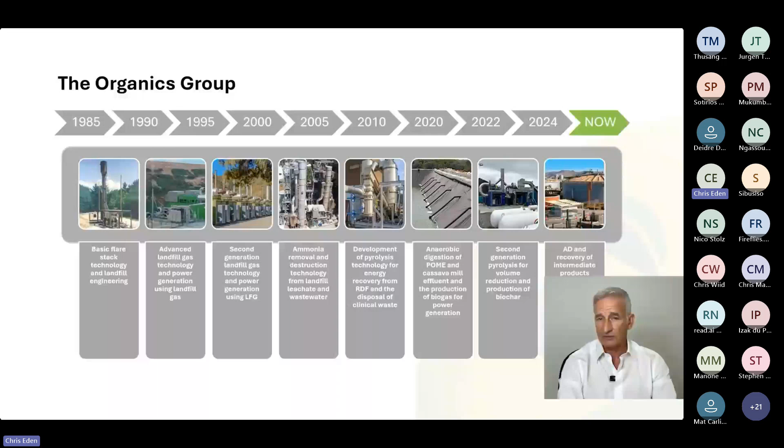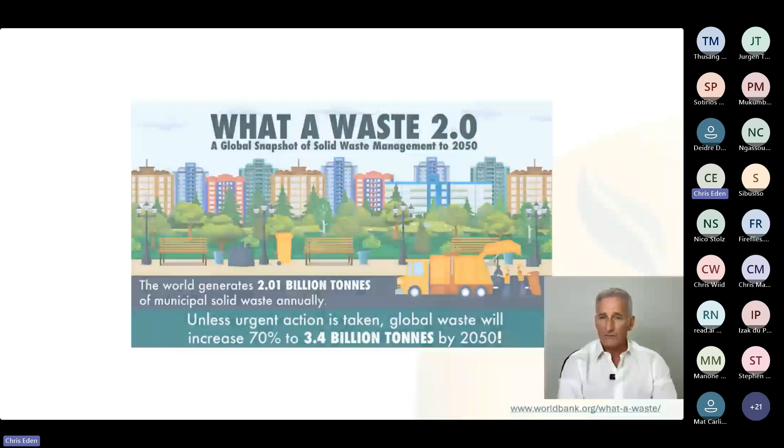The world is facing a growing waste management crisis that affects every country and everybody. The situation is well presented in this brochure prepared by the World Bank. As urbanization, economic development, and population growth continue, the World Bank projects a staggering 70% increase in global waste generation, from 2.01 billion tons in 2016 to 3.4 billion tons by 2050. Food and green waste make up a significant proportion of the total waste generated globally, accounting for up to 44%. While Africa currently generates the least amount of waste compared to other regions, it still faces unique challenges in terms of modernizing and improving its waste management practices.

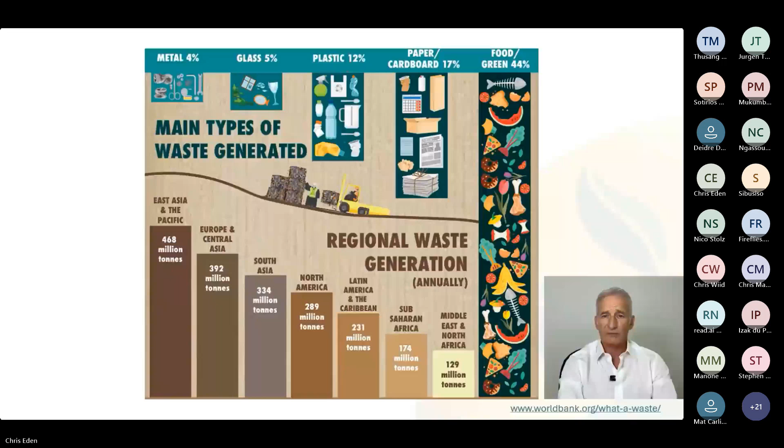Shockingly, at least a third of this waste is currently mismanaged through unsustainable practices like open dumping or burning, leading to environmental, health, and economic consequences. This alarming situation underscores the urgent need for effective and sustainable waste management solutions to protect our planet and its inhabitants for generations to come. Moreover, the inefficient use of resources and the failure to recover valuable materials from waste streams leads to significant economic loss, not to mention the missed opportunities for job creation. So something needs to be done.

The feedstocks for AD can come from a variety of sources, including manure from livestock, wastewater with biosolids from municipal sewage sludge, as well as other organic waste such as fats, oils, grease, and crop residues. These feedstocks can be digested in isolation or co-digested to optimize the AD process. During the process, the feedstocks are broken down by the microorganisms in an anaerobic environment, typically within a sealed reactor or digester, and the end products of this process are biogas and digestate.

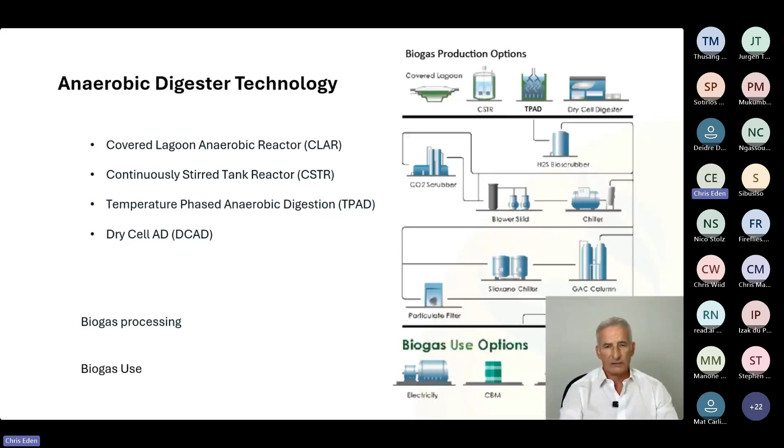Once it's been cleaned and prepared, biogas can be used to generate electricity or heat, and used as a vehicle fuel in the form of compressed biomethane. So the first technique we're going to be looking at is the covered lagoon anaerobic reactor.

It's a process that treats liquid waste with low solid content in large, shallow earthen basins covered with a gas-tight membrane. The anaerobic microorganisms break down the organic matter, producing biogas and treated effluent. The process is suitable for waste such as animal manure, industrial wastewater, and diluted food processing waste with a solid content of less than 3%.

Lagoons are designed to have a depth of between 4 to 6 meters and a large surface area with a retention time of around 30 to 60 days. Biogas yield depends on the feedstock type, the organic loading rate, and the operating conditions, while the treated effluent can be used as a fertilizer.

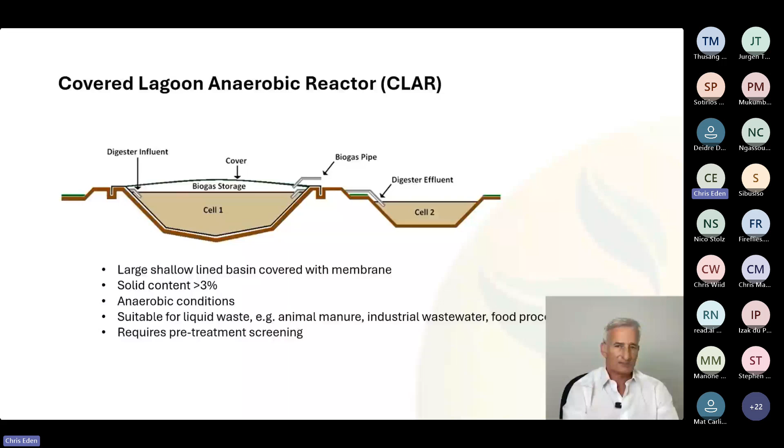This photograph shows a covered lagoon installed on a palm oil wastewater treatment plant in Indonesia. The lagoon is purpose-built with a series of internal injectors that encourage methane production. The biogas generated must be cleaned of impurities before it can be used.

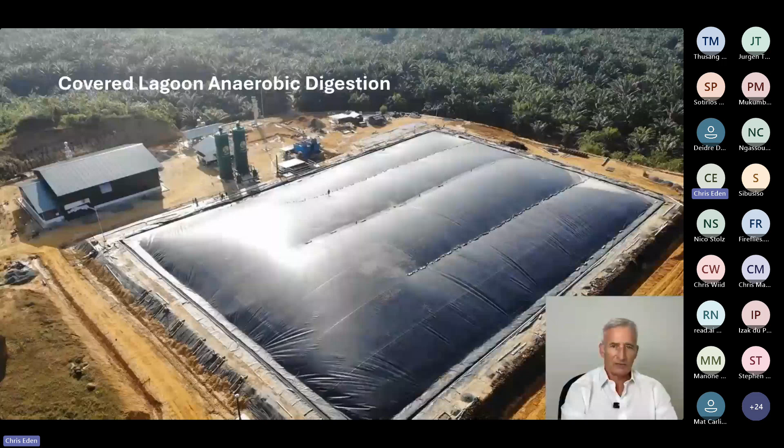Operating parameters include that it can operate between 10 to 40 degrees centigrade, depending on the climate and the availability of heat. But of course, this has a direct effect on the retention time, which can be between 30 and 60 days, depending on the feedstock and the temperature. The pH is maintained between 6.5 and 7.5 for optimal microbial activity.

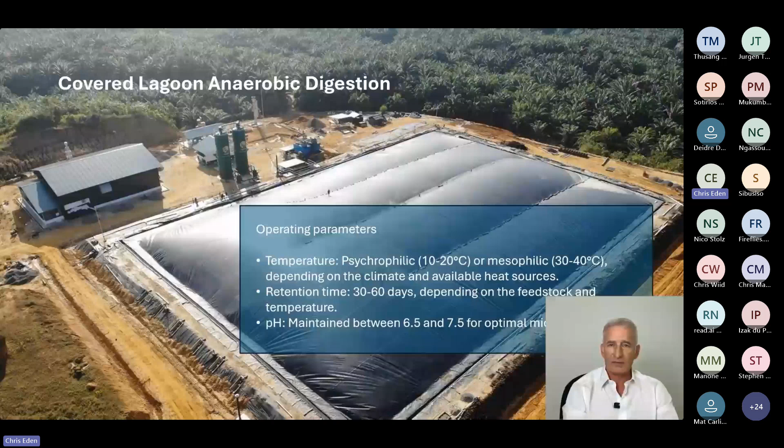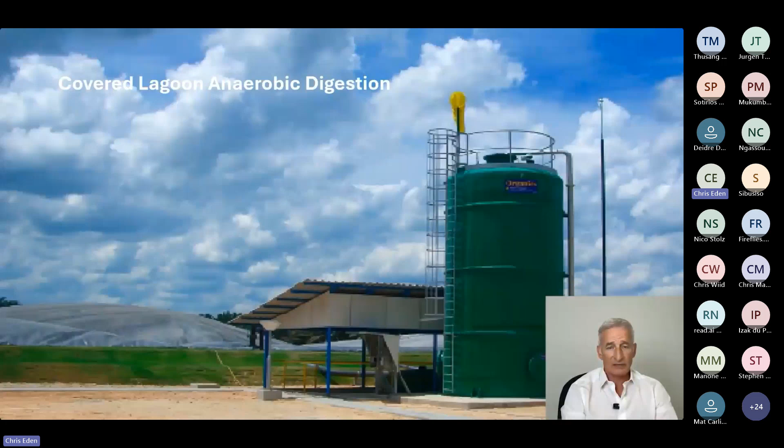In the next photo, this illustrates the use of biogas from the digestion of palm oil mill effluent. In this case, the methane is being used for the generation of power to provide electricity to the palm oil mill itself.

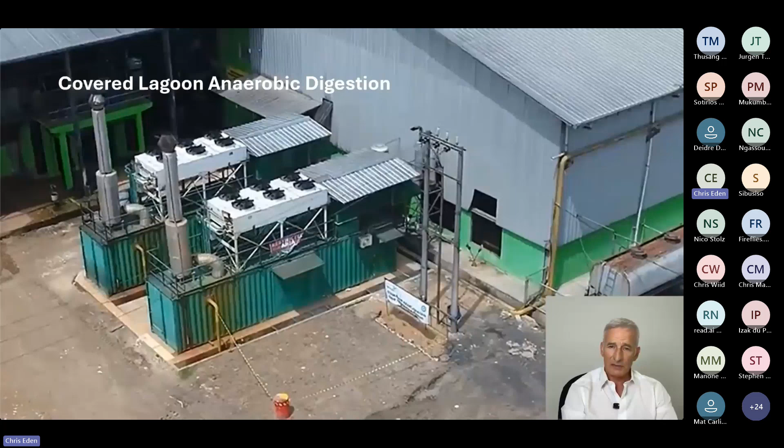CSTR is a type of anaerobic digestion where the feedstock is continuously mixed in a cylindrical egg-shaped reactor tank. Bacteria break down organic matter in the absence of oxygen, suitable for liquid feedstock with a solid content of up to 12%. For example, wastewater treatment plant biosolids or industrial wastewater.

As minimum solids content, we recommend 0.2 to 0.5% solids content and a minimum COD of about 3,000 milligrams per liter. Feedstock should be free of large particles and grit to prevent sedimentation.

Myself, as an anaerobic digestion advisor for over 40 years, I have extensive experience with many different designs of CSTR digesters, many different mixing systems, and we will discuss some of that here in this presentation.

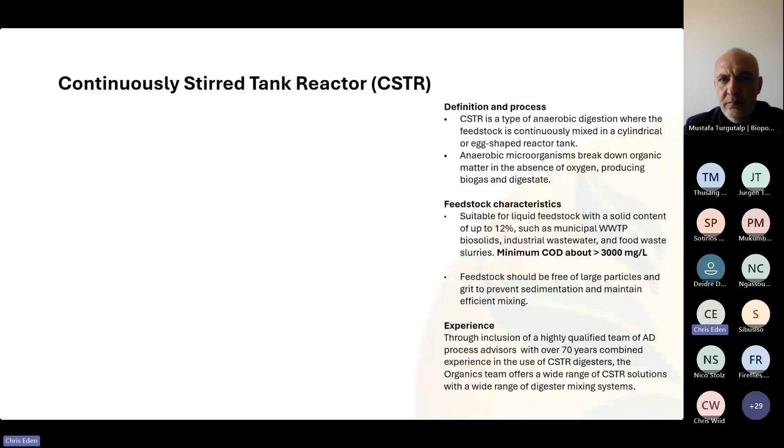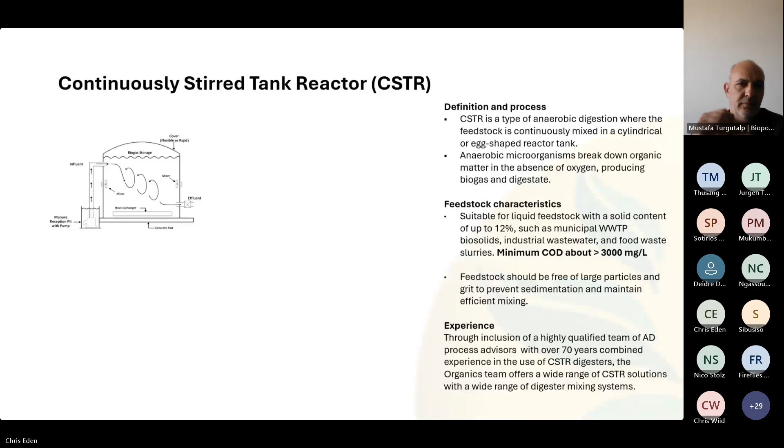Here is a schematic showing that for a manure application, the feedstock will be pumped into the digester either at the bottom or the top, as shown here, and the mixing system can be mechanical or hydraulic with jet mixing, or biogas recirculation through the tank with the aid of eductor tubes brings the feedstock in contact with the resident sludge of the anaerobic bacteria. Feedstock should be free of large particles.

This is a design from 1990, one of the first agricultural digesters in New Zealand, working on the sheepyard droppings as well as high-fat waste from the rendering operation at a large slaughter facility.

In the old days, the biogas was stored in an external pillow tank. Normally, these days, we have it all under the roof in the double membrane roof.

Here, a more modern application with a fixed roof CSTR digester from the largest food waste digester in the Southern Hemisphere that was designed and constructed in 2000 in Sydney. The biogas was basically used as it was generated for power production and for drying the digested residue.

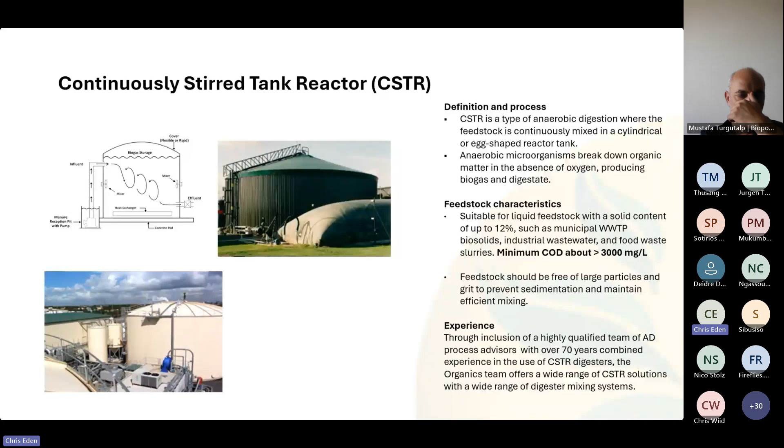At Organics, we offer, in addition to traditional CSTR design, CSTR Plus, where we add features to increase the digestion efficiency and the organic loading rate.

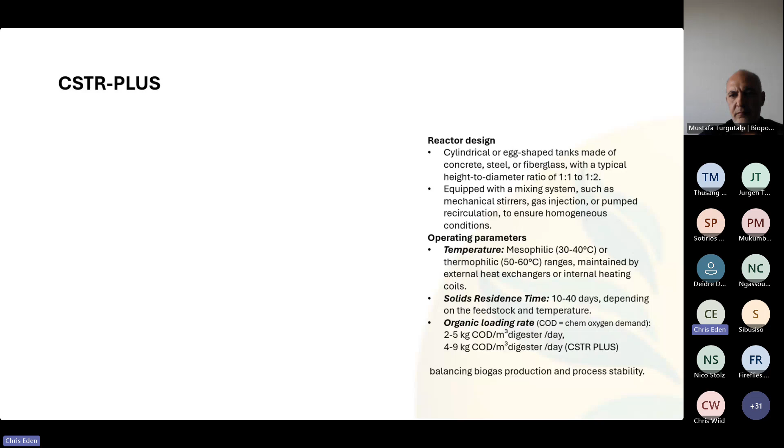Mixing systems like mechanical, gas injection, or pump recirculation are available for all those applications. Temperatures could be mesophilic or thermophilic, maintained by external heat exchangers or internal heating coils. Solids residence times, depending on the concentration of the feedstock, between 10 to 40 days. And of course, temperature plays an important role.

A standard CSTR without the plus feature may be 2 to 5 kilograms COD per cubic meter digester per day, a suitable organic loading rate. With the plus feature implemented, it is typically double that amount. It could be triple depending on the nature of the waste.

Critical is, as always, balancing the biogas production and process stability.

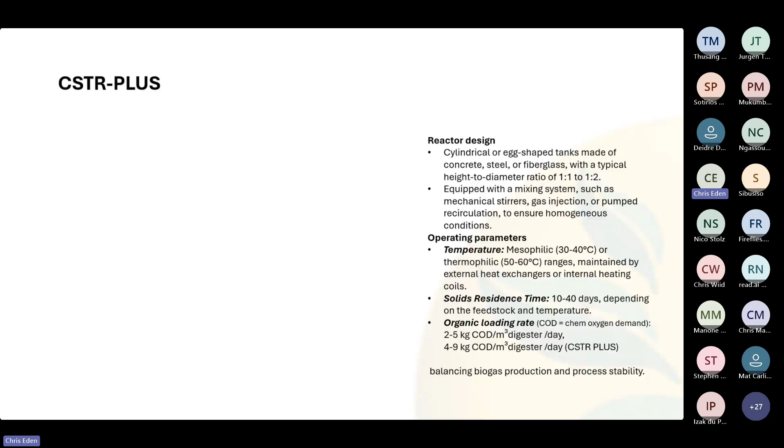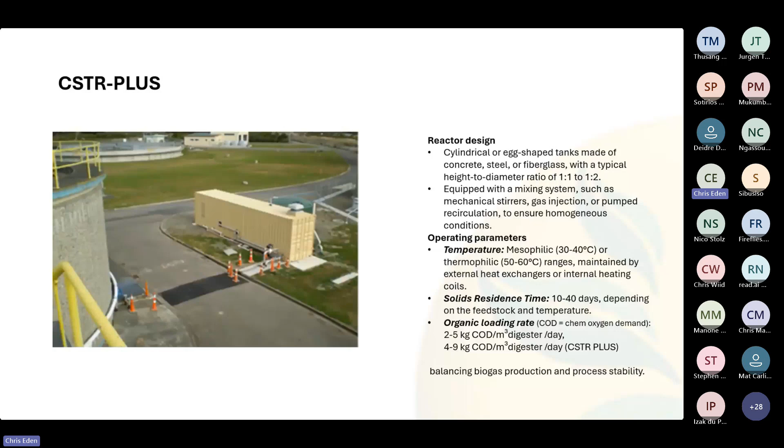Here's an example from New Zealand where the plus feature, a recuperative thickener, is housed in a container connected to an existing 50-year-old digester tank, which allowed doubling of the throughput and the permissible COD loading rate to this existing digester tank. So it can be retrofitted.

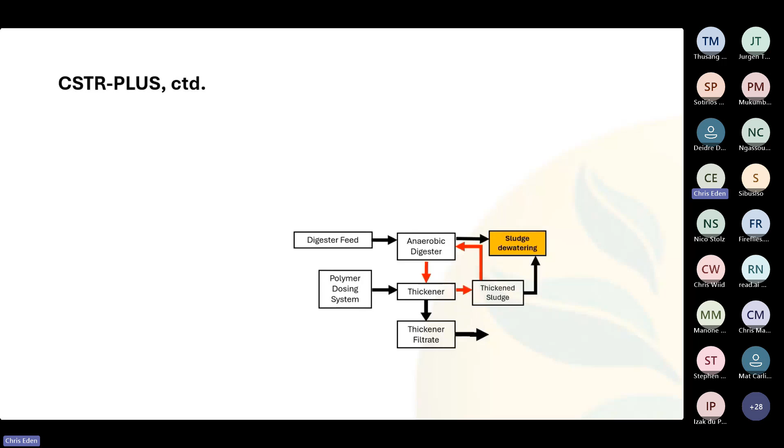The feature is shown with this process flow scheme in the red arrows: digester contents are continuously pumped through the thickener. The thickened sludge is returned into the digester, and the excess filtrate removed can be disposed to further treatment or other applications. Part of the thickened sludge can also be forwarded to sludge dewatering to make sludge cake for export from the plant.

Typical thickeners can be drum thickeners, but there are many other options to choose from. All have in common low power consumption, full automation, and low maintenance. A weekly clean is normally sufficient, and low polymer consumption, 4 to 5 kg polymer per ton dry solids. For example, in dewatering, the polymer dose will be 2 to 3 times that amount.

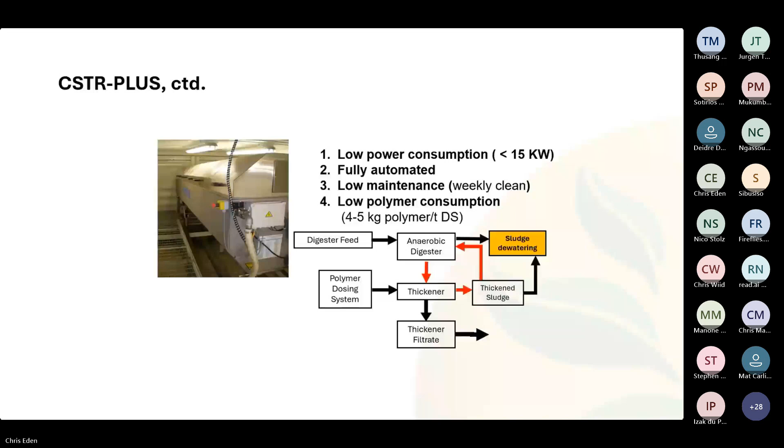Here's an example of the filtrate removed from a municipal wastewater treatment digester. In this application, the recuperative thickener was in a separate building, allowing the whole sludge load to run in a single tank, permitting clean out, rebuilding, and optimization of digestion in the other tank. One could then swap the thickener over to the reconfigured tank and upgrade the tank that was previously running at double the load due to the recuperative thickening or plus configuration.

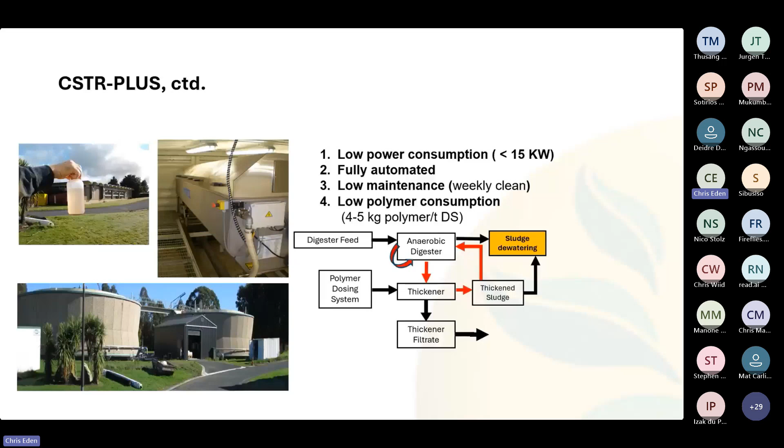In high fat content waste applications, the plus feature is possible, but typically would not be as advantageous as in standard CSTR applications. Continuous mixing prevents formation of dead zones.

The biogas yield depends on feedstock type, organic loading rate, and operating conditions. Typical biogas composition could be 55 to 75% methane. High fat content gives high methane content in the biogas, and we use a bioengineering approach to optimize the digester bacteria culture for fat digestion.

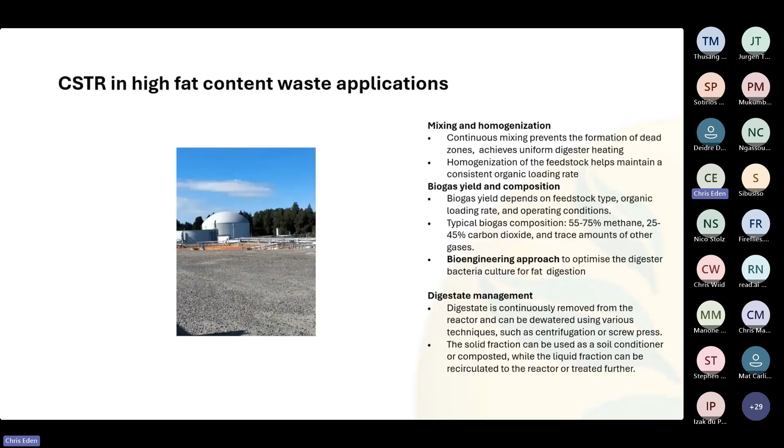This is an application of a CSTR plus feature in a recent dairy factory commissioned by us five years ago for the removal of DAF sludge and other high fat wastes from the dairy factory.

Now, the big picture this is based on is the standard known flow diagram of carbon and electrons in anaerobic digestion. Complex organic polymers are converted to volatile fatty acids and long-chain fatty acids, which are broken down by symbiotic bacteria into acetic acid, hydrogen, and formic acid.

Then hydrogen, formic acid, and acetic acid are removed from the digestion broth by methane bacteria to produce CH4 and CO2. So methane bacteria remove acid in essence and produce gas, leading to acid removal and neutralization of the pH in the digester.

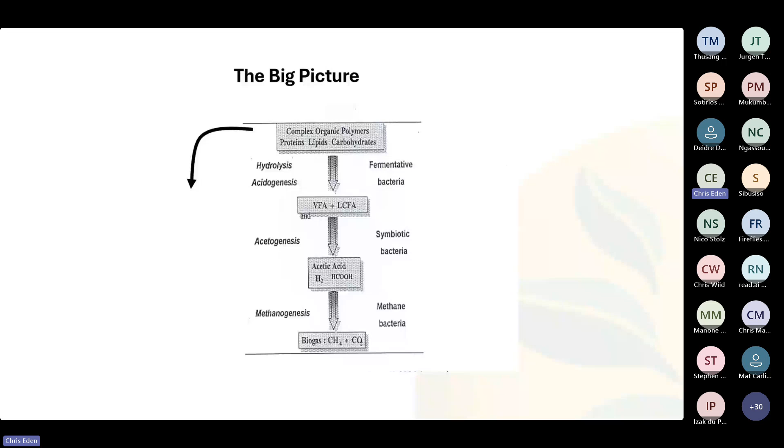If the flow from the top into the digester is higher than the removal activity the methane bacteria can catalyze, the digestion process is likely to acidify and become self-inhibited. Other inhibitions are ammonia, produced from protein degradation, which gradually inhibits methanogenesis. Long-chain fatty acids from fat degradation are very potent inhibitors of methane bacteria. So the system has to be well balanced to have a stable COD flow from the top to methane and CO2.

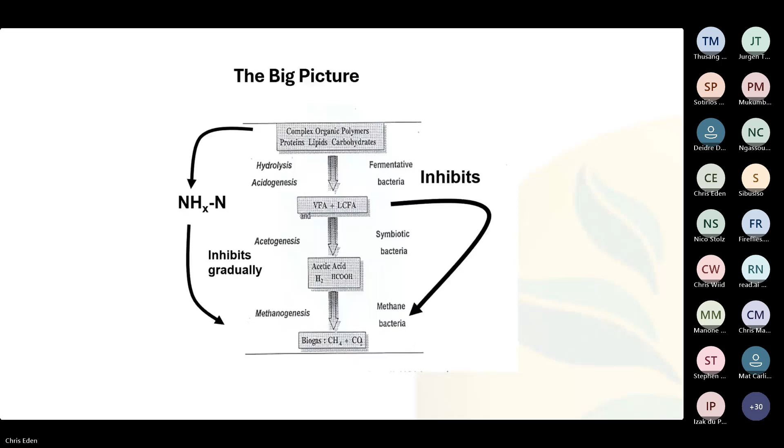Looking at the big picture, mesophilic ranges typically have half the capacity for COD loading at the top, at the complex hydrolyzing bacteria level, and also half the capacity of thermophilic bacteria for methane production and COD removal.

In order to adjust a digestion process, one can couple two CSTRs in series to achieve digestion stage separation, and we'll show an example later in this presentation. This digestion stage separation adds robustness and resilience to the digestion process. The initial hydrolysis stage produces acids, and the final methanogenic stage removes the acids in a separate tank.

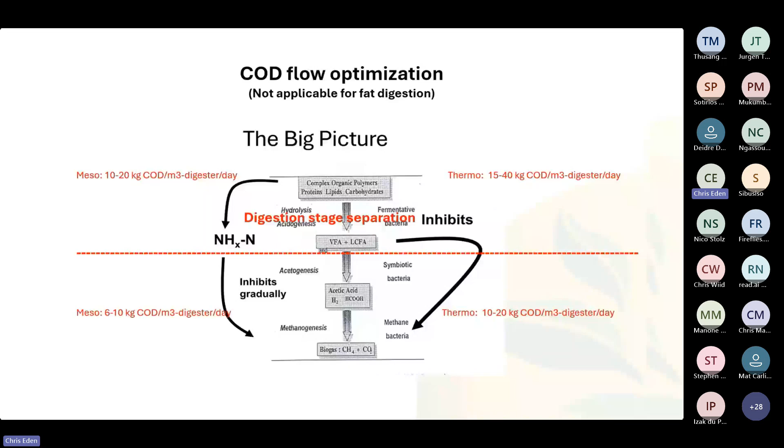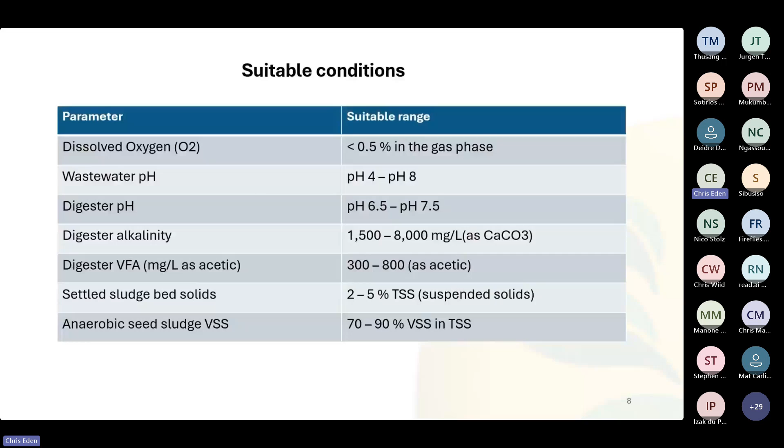Suitable conditions, I won't discuss in detail here since we're running out of time—happy to do it in questioning. I'll document it in this table, along with inhibition thresholds for various process parameters like temperature, pH, sodium, potassium, volatile fatty acids, and COD level in the digester. Again, I'd prefer to cover that in questioning rather than in this presentation.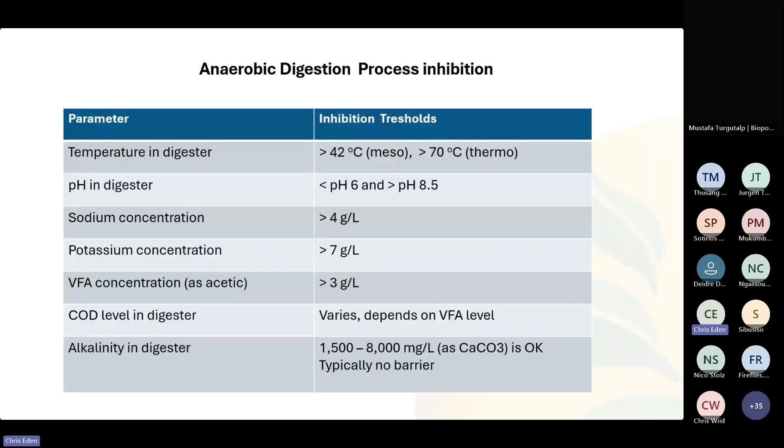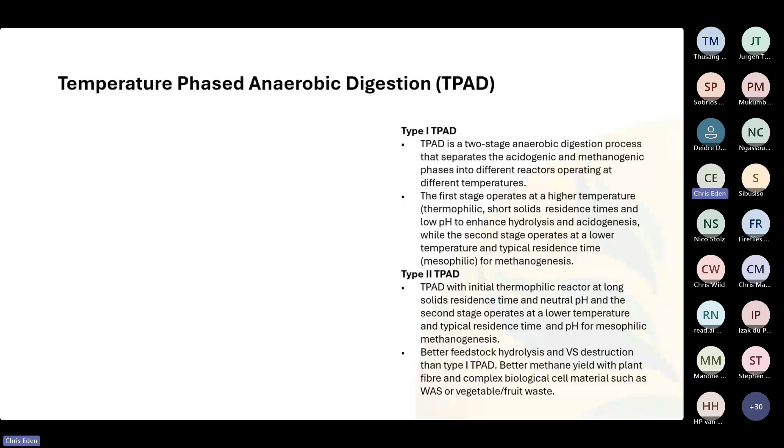One application of separating the phases of anaerobic digestion into two sequential CSTR digesters is temperature-phased anaerobic digestion, or TPAD. In TPAD, dewatered sludge or other material like municipal solid waste can be macerated and pumped into a thermophilic reactor, where hydrolysis happens twice as fast as under mesophilic conditions, at 55 to 65 degrees with a solids residence time of 1 to 2 days, turning a proportion of the loaded material into acid. The acid is then pumped into a methane reactor.

We changed this so that the hydraulic residence time is preferably 8 to 10 days, not 5 days as shown before in the diagram. The solids residence time is typically 10 to 15 days in the mesophilic reactor, to degrade the products of thermophilic metabolism. This is type 1 temperature-phased anaerobic digestion, called temperature-phased because a thermophilic phase is followed by a mesophilic phase. The solids can be removed for dewatering and then composting, and the centrate can be used as feedstock to recover ammonia in ammonia recovery facilities.

This is a typical type 1 TPAD. Type 2 TPADs are slightly different: we make the first digester much bigger than in type 1 TPADs, getting a long solids residence time in excess of 15 days, and therefore quantitative breakdown of the organic matter under the preferable thermophilic temperature at higher rates. That is then pumped from a type 2 system through the mesophilic reactor, very similar to the mesophilic reactor in a type 1 TPAD system.

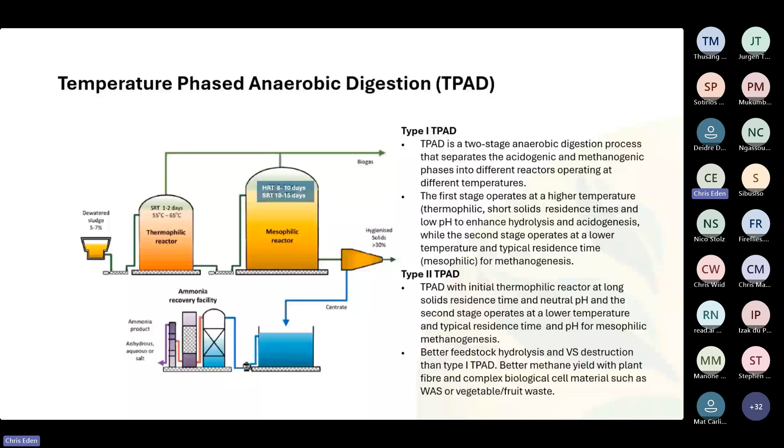Here's an example of a type 2 TPAD from the wastewater treatment plant in Christchurch, suitable for a wide range of feedstocks. It gives higher biogas yields because at the high temperature and long residence time in the first thermophilic stage, we're breaking down complex polymers much more extensively than in a type 1 TPAD. Typical biogas composition is 60 to 70% methane, and ammonia could be recovered - it's not recovered in this case, but it could be recovered after the first stage, because the breakdown of carbon has been nearly quantitative, and so has protein hydrolysis and breakdown.

A case study now for the startup of the type 2 TPAD in Christchurch. The first stage is an acidogenic thermophilic phase at 50 to 60 degrees. The second stage is a methanogenic reactor at 30 to 40 degrees. The first stage had a volume of about 15,000 cubic meters in 2 tanks. The second stage had a volume of about 18,000 cubic meters in 4 tanks. Because of the configuration, we achieved a 15 to 25 day SRT in the first stage, and therefore a neutral pH.

Acid production was handled by thermophilic methane bacteria, giving us a much better yield of biogas. The second stage was used basically to remove any residual degradable COD from the effluent of the first stage.

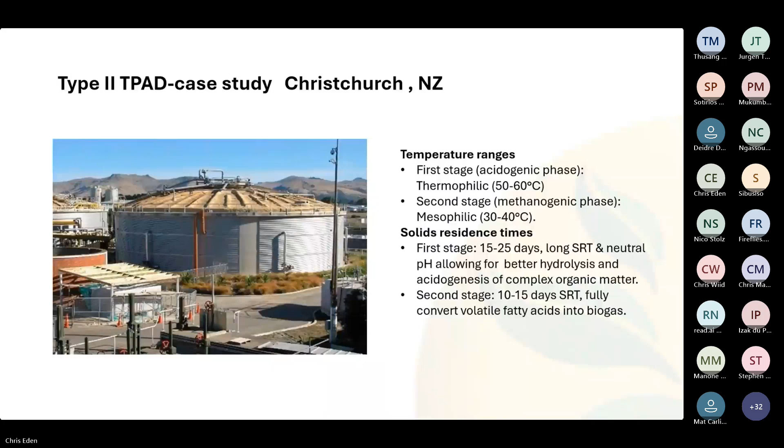The original digester plant, commissioned in 1961, had 4 mesophilic reactor tanks. My team was then appointed in 2010 to design the commissioning and startup of the thermophilic stage using mesophilic bacteria as seed sludge. I'll bring you an example in this case study of how that can be done.

With the startup regime we designed and implemented, we increased biogas production by 67%. An estimated 70% of that came from the increased solids residence time, and the remaining 30% came from an increase of activity in the thermophilic digester. So it's a combination of beneficial events that gave us the significant increase in biogas production.

Volatile solids destruction efficiency increased by 19%, to a total efficiency of 77%. The solids content in the digested solids was slightly less, while at the same time the volatile solids content of digested solids decreased from 69% to 62%, evidence that the organic matter has been degraded more quantitatively.

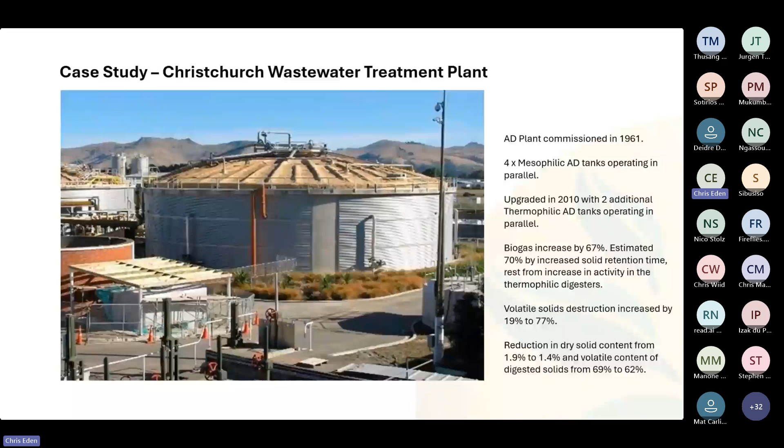Here is the actual profile. The blue bars give us the activity of gas production measured as methane in the mesophilic stage, and the red bars show what was produced in the thermophilic stage. As you see, this is from 2010, reported in 2011. Once the thermophilic tanks were operated under mesophilic conditions, the extra working volume they provided allowed a gas production increase from about 450 normal cubic meters per hour to about 650, simply because of the added working volume.

But then, once we changed the operating temperatures and turned the mesophilic sludge through thermophilic acclimatization into thermophilic bacteria, the thermophilic bacteria radically took over the COD flow and turned the total load into about 750 normal cubic meters per hour of methane, of which about 20% came from mesophilic activity in the second stage, and 80% of that increased gas production came purely from the type 2 cultures established in the thermophilic stage. So there are different ways you can do temperature-phased digestion, and the way we designed and implemented in Christchurch, which we've also implemented at other facilities, gives better results at the end of the day than a traditional type 1 TPAD design.

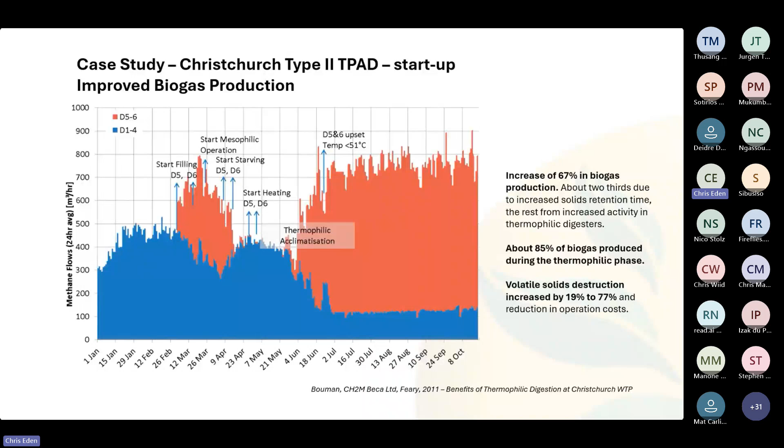This type 2 TPAD can also be applied to non-municipal waste. Here's a design that Organics is offering for fruit and vegetable waste in various places. This would probably even end up in South Africa if the project is accepted for implementation.

We would have a mixed waste with a very low contaminant level, further decontaminated from plastic, paper and timber residues. Glass and metal would be absent from the waste by default. Rejects are removed after handpicking and a trommel screen removes other materials not picked up by hand. Then a macerator turns it into a small slurry of fine particles.

In a deep day tank with pH dosing to add alkalinity, we produce the feedstock for a type 2 thermophilic design. The reactors operate under the conditions discussed before for type 2 applications. Sand and silt are removed from the bottom and scum from the top, and what's left over after thermophilic treatment is then polished in a mesophilic reactor, again with recuperative thickening in a CSTR plus configuration to increase the reaction rate and efficiency of the mesophilic bacteria.

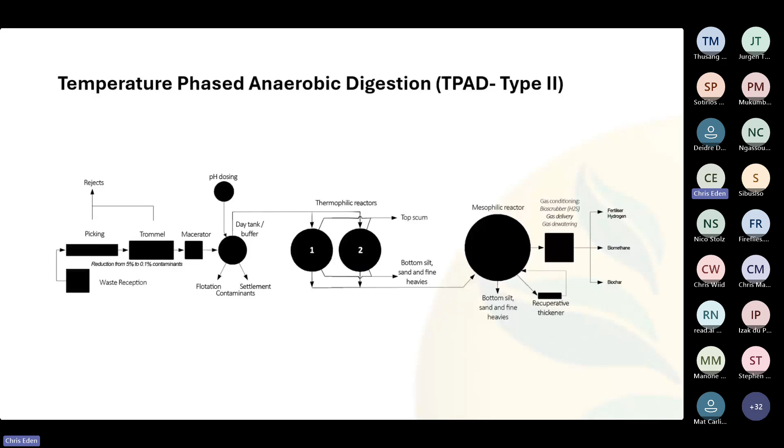The final technique we're going to look at is dry cell anaerobic digestion. This is a technique in which organic material is stored in a chamber long enough to ensure complete digestion of the organic content. The solid content of the feedstock is much higher, generally between 20 to 50%, and the only water added is generated by the process itself.

Digestion takes place in a sealed, oxygen-free reactor where microorganisms break down the organic matter, producing biogas and digestate. Dry cell requires less water and smaller reactor volumes, reducing the overall footprint of the digestion plant, and it can handle a wider range of solid feedstocks, including those not suitable for wet digestion.

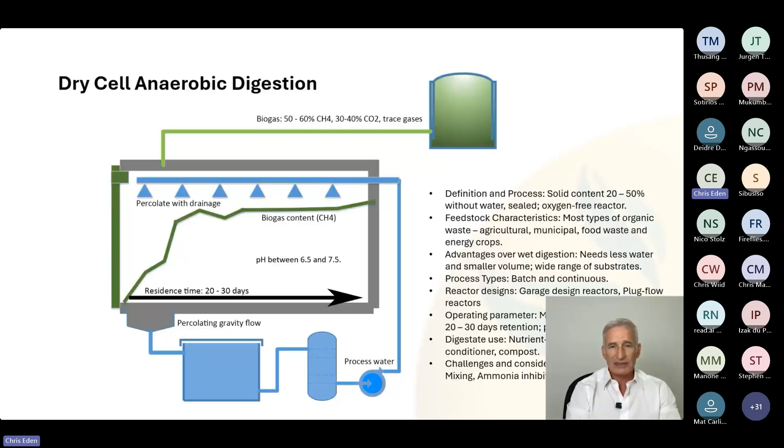The second type is a plug-flow cell reactor. These are used primarily at dairy operations, where manure is collected by scraping and then moves through the reactor as a plug.

Using this technique, there is usually minimal mixing. Biogas yields are similar to the garage-type reactor, and in both cases, digestate from the processes can be used as a fertilizer or soil conditioner. But generally this requires further processing, such as composting or drying, depending on how it's going to be used.

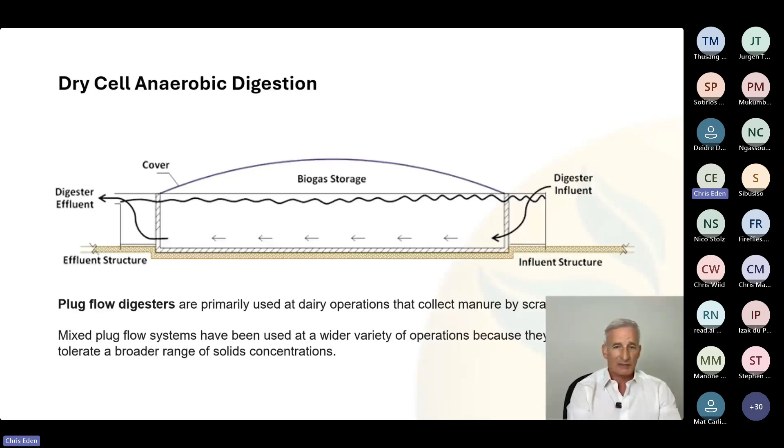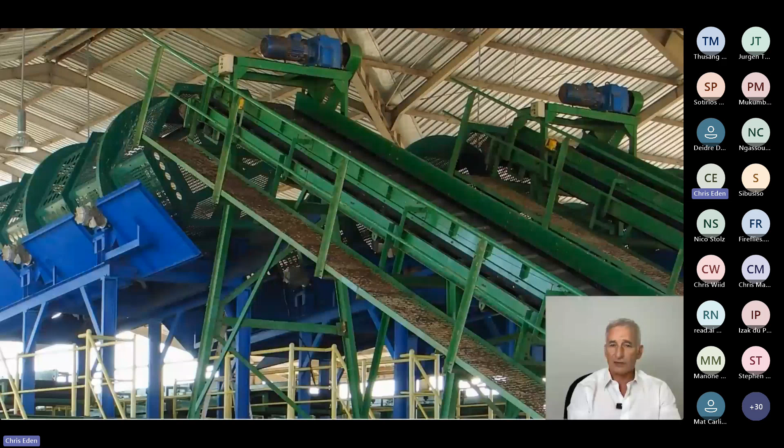The images are from a project we installed in Bali, Indonesia. The plant was a dry cell plant treating municipal solid waste. As a first step, the feedstock had to be separated using a series of trommels. The organic fraction was then fed into a series of dry cell digesters, in this case garage-type digesters, and left there for around 30 days.

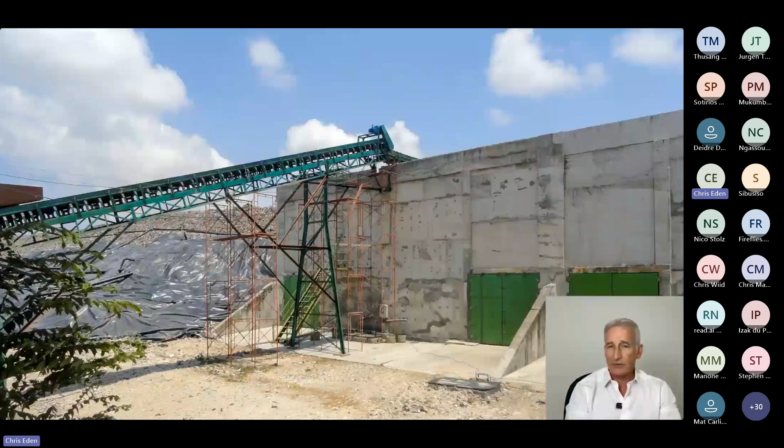The produced biogas was cleaned of impurities and then used in the generation of power. In this case, the energy was used on-site as well as being injected into the national power grid.

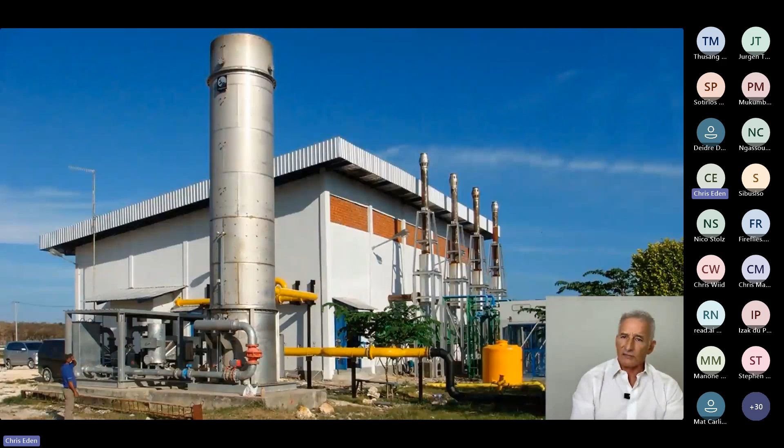So in conclusion, we can say that anaerobic digestion is a versatile, proven, and sustainable technology for biogas production, and is an appropriate technology for dealing with the vast amounts of organic matter being generated, and projected to be generated, in the future.

It reduces the volume of waste that goes to landfill and the problems associated with odor. It produces a nutrient-rich digestate and supports local economies through job creation.

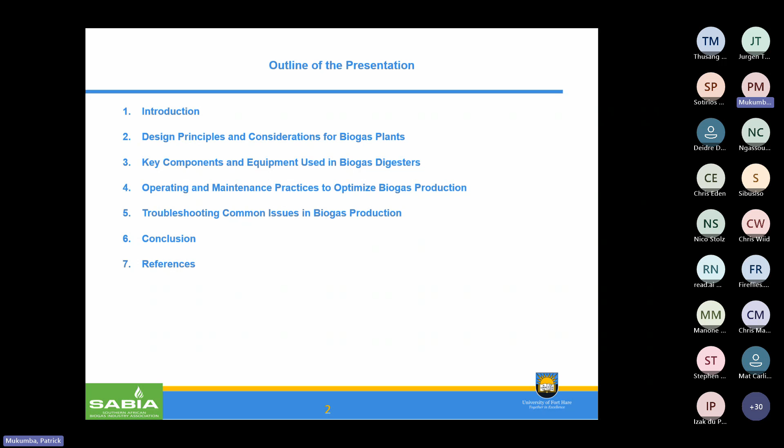Currently, we're working on small-scale biogas digesters. And within the term, we'll work on digesters at activated sewage treatment plants, that is large-scale digester systems.

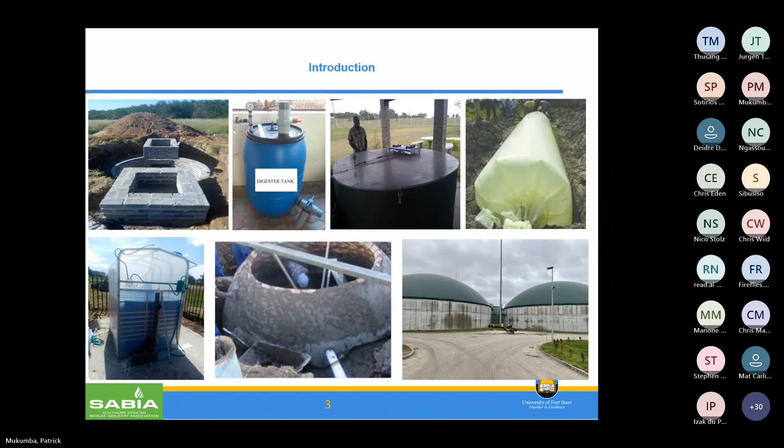On design principles for digesters, for example, if a farmer has got a number of animals - it can be goats, cows, sheep - you are supposed to know the design considerations, what is expected, how the digester is going to be built, and the availability of substrate.

So when designing a digester, the following should be considered. We consider feedstock characteristics, or what type of feedstock are you going to use. If a farmer has got cows, how are you going to design the digester? If you have sheep, how are you going to design the digester?

On our design equations, there is an equation that involves use of, or the quantity of the substrate, or the quantity of waste to be used for biogas production. So you have to consider the quantity and quality of waste. For example, cow dung has got less biogas as compared to human waste, and cow dung has less biogas as compared to poultry manure.

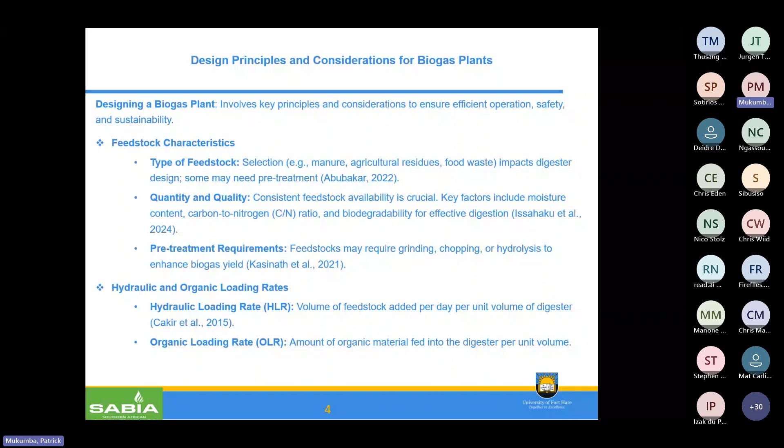And also when designing systems, you have to consider gas collection and storage. Your system should be airtight, because in most cases, most digesters have a problem of leakages. Biogas is produced, but on the way it can leak. So we have to consider gas tightness so that there are no gas losses.

And also, when designing these systems, you are supposed to consider storage capacity - how are you going to store your gas? For example, you are producing large amounts of gas, but you don't have gadgets to utilize it. So you need to have biobags to store the biogas, or you can have LPG cylinders, whereby if the gas is compressed, it is stored in LPG cylinders.

And also, in your design, you should consider whether the biogas is going to be purified. For example, you want to use the biogas for driving a petrol engine - you've got old petrol engines, and petrol may be very expensive, so you want to use biogas instead. That biogas needs to be purified, because carbon dioxide is incombustible. So carbon dioxide is removed, so that when biogas is used as an internal combustion fuel, it can burn, because the incombustible carbon dioxide has been removed.

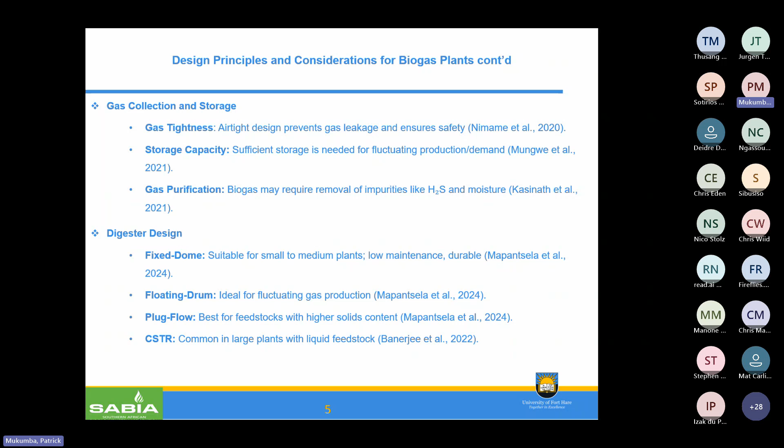When designing these systems, you are supposed to consider a retention period. Some wastes need more time in the digester, and some need less time. We should also consider temperature. Now, in most digesters, they are built underground, because underground digesters are affected minimally by temperature.

When there are temperature fluctuations, biogas production is affected. So in cold regions, we can introduce some renewables to ensure that biogas is produced at a constant temperature. For example, you can produce biogas at 35 degrees.

How are you going to produce biogas at 35 degrees? You can incorporate a solar module supplying electricity to a battery. But before that, you have to size the battery according to the coil that is going to heat the waste in the digester, because you want a constant temperature. When there are temperature fluctuations, biogas production is affected.

These factors are also considered when designing our digesters, along with economic and financial considerations. For example, a farmer might have 100 pigs, 100 goats, 100 chicken, or 100 sheep or donkeys. When designing the system, we have to consider economic and financial considerations.

For example, when you design your system, you have to consider profitability. You are designing that digester for producing electricity, and you have to produce it economically. You have to calculate the profitability—how much profit is supposed to be obtained by the farmer—because you cannot just have that system for zero profit.

When designing a system under economic considerations, if the farmer wants to get money from the bank, you have to tell him the payback period, the profit, the net present value, and the internal rate of return. The farmer needs to know all those things, because he should not produce electricity uneconomically.

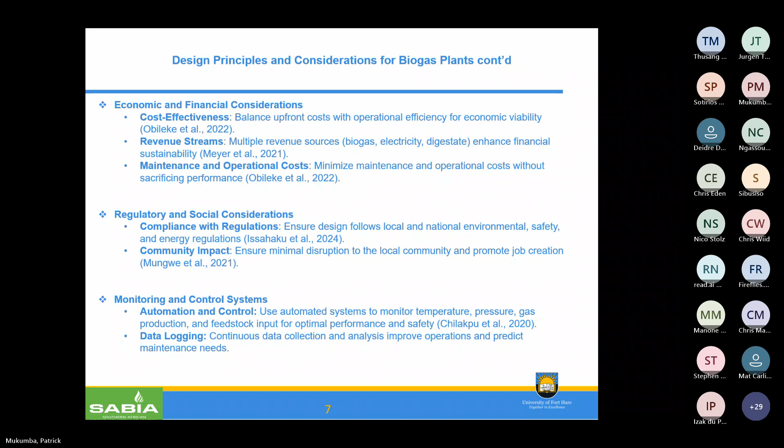After a month, you can come and download the data, and you can see that on a day when you were absent, the digester pH was like this.

I found it necessary to have some design equations. A farmer can come to your home and say, okay, I have so many pigs, so many horses, so many donkeys, 100 vegetable beds, I've got a lot of leaves.

So I want to have a digester at my farm, and the farmer can say, I want 5 cubic meters of biogas to be produced daily. He can just specify how much gas he wants produced daily, so we can design the digester according to the requirements of the farmer, because his gadgets, engines, and generator need 5 cubic meters of biogas a day.

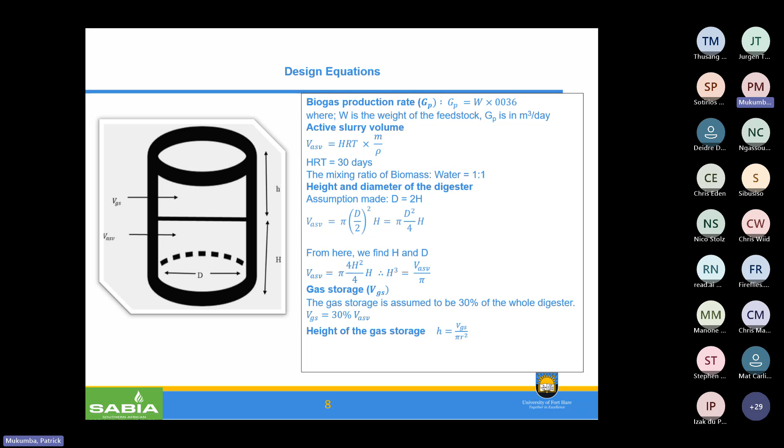Second point, we can come to a farmer. Let's say this farmer has got 20 head of stabled milk cows, 100 head of pastured cattle, and 10 head of pastured goats. The farmer wants to construct a biogas plant, and we want to design the digester according to the waste the farmer has.

It's like saying we are 3 in a family. The family can say, okay, we are only 3, so we are producing so much waste. So we can design a digester that is proportional to the waste coming from 3 people, whether it's father, mother, and their son aged even 15 years.

So now the farmer says, I've got this, but I want to produce biogas for electricity production. I have got more than 10 engines there, and they are 50 years old, but I want to drive these engines using biogas. So what should I do?

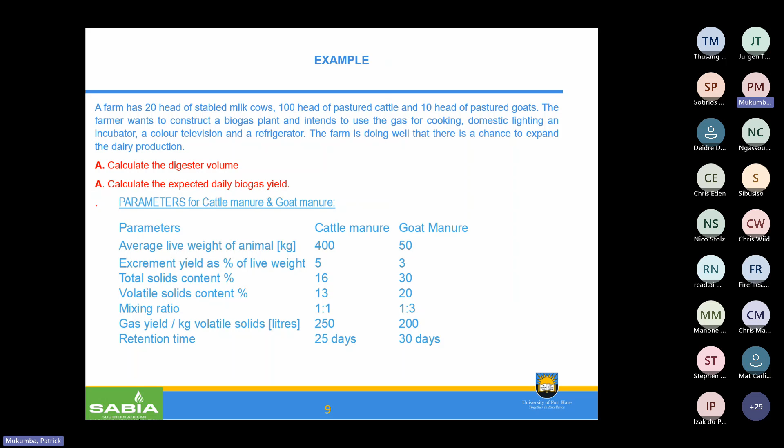So meaning that I've tried to work the digester volume from the farmer's availability, or from the farmer's waste. He's got all those animals, so first of all you are calculating the volume of the digester.

You can calculate the volume of the digester, and we're saying the volume of the digester is given by SD times RT. When you're calculating the volume of the digester, when you're designing these systems, you need to know the retention time, the time taken by the substrate to be in the digester.

The volume of the digester is given by SD, whereby SD is biomass, which can be our waste, plus water, because you have to mix biomass with water. You have to mix your substance with water, whether it's 1:2 or 1:1, depending on whether the biomass is wet or dry.

So you can find that I was trying to work out the equation, and you can find that now, since it's goats and cows, we have to calculate the digester volume for goats, digester volume for cows, and then we just add them to find the total biogas digester volume.

But however, the farmer may have caged chickens, and the farmer may have chickens that roam around. So you can find that we're not just calculating biogas yield simply, because you cannot say the farmer can collect all the waste from roaming chickens the same as from caged chickens. So you should consider all those things, whether the chickens are roaming, whether the cows are stalled, or they're moving around.

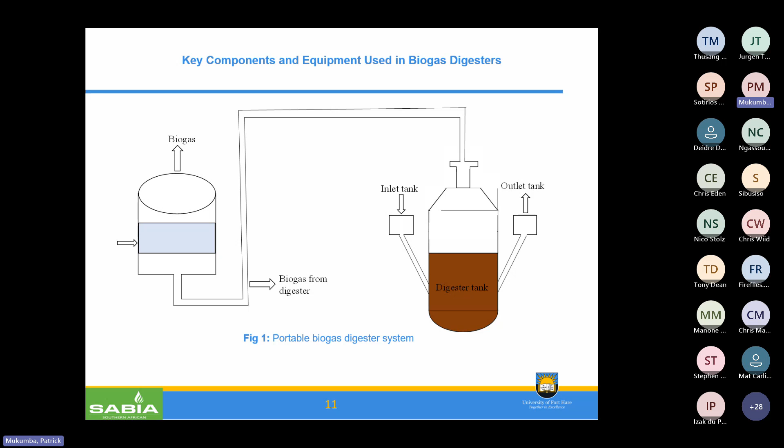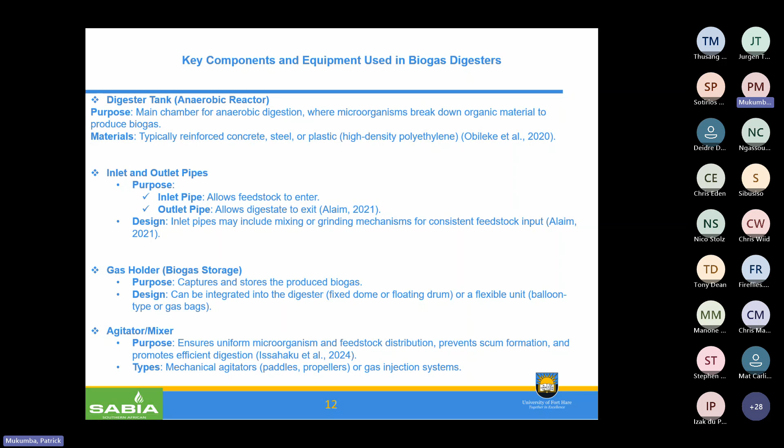So for key components and equipment used, we have inlet, outlet, and we also need a gas holder and an agitator or mixer. Those wastes you put in a digester are supposed to be stirred to avoid formation of scum. So you can also design an agitator, an automatic agitator so that after 10 minutes or after 1 hour, the system can stir the digester contents. After 1 hour, it starts to stir, and so on.

And also, we're developing these portable biogas digesters, and most of them are supposed to be surface digesters. We should usually include a heating system because there are a lot of temperature fluctuations, like in winter. In the morning the temperature can be at 20 degrees, in the afternoon it can be 10 degrees. Those temperature fluctuations affect biogas production. So we are supposed to include a heating system, whether using a solar water heater supplying hot water to coils embedded in the digester waste, or a solar module supplying electricity to a battery, and that battery supplies electricity to the coil, because usually the coil we're using is 350 watt coils.

So meaning that if you know the wattage of the coil, you're able to size the battery, you're able to size the solar modules, and if you want to use a wind turbine, you can size it to know whether it should be even a 100 watt wind turbine or a 1 kilowatt turbine, depending on the demand of the coil.

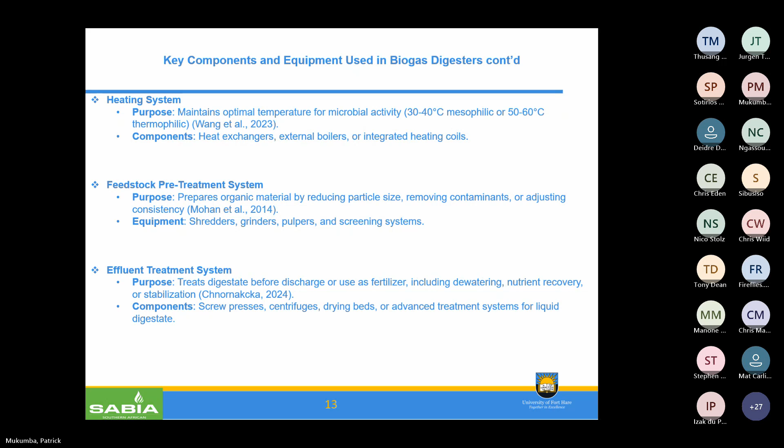And also, as I've said, key components also have to consider gas scrubbing and the purification system. It depends on the usage of biogas: whether you want to use it for electricity production, to drive an engine, for heating purposes, or for cooking purposes. So you have to consider all these so that at the end, if I want to use the biogas for electricity production, should I remove carbon dioxide? Should I remove hydrogen sulfide? Should I remove moisture? All those are considered. That's why your biogas system should have a purification system and an upgrading system.

And also gas utilization equipment, because at the end, the biogas is supposed to be utilized. You cannot just produce biogas for no reason. I'm producing biogas because I want to use it to drive my refrigerators, to drive my engines and other components in the house. That's why I say you're doing these projects so that there is an economic benefit.

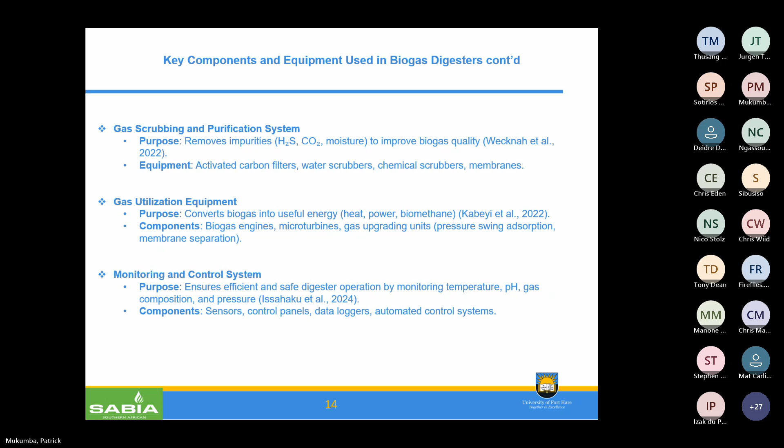We are trying to heat the biogas substrate so that there are no temperature fluctuations. We want to create mesophilic temperature in the digester, between 30 degrees to 37 degrees, because in winter biogas production is affected.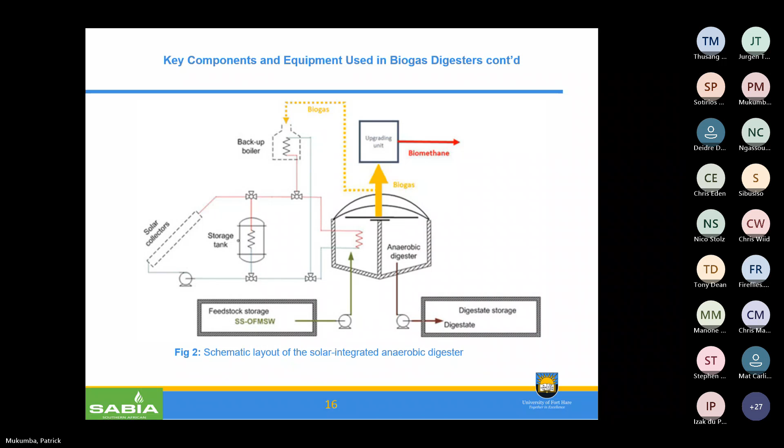So we need to introduce a heating device to ensure biogas production is not affected. And also, on operating and maintenance of biogas digesters, we should consider consistency in how you feed the digester. If you're feeding it daily with, let's say, 1 kg cow dung, it should be consistent.

And also monitoring and maintaining temperature. You should maintain temperature, because it should not fall. If it is at 50 degrees today, then tomorrow it's 10 degrees, you find that biogas production is affected. So you need to control temperature for maximum biogas production, because you want to optimize it.

How are you going to optimize biogas production? You want to keep the temperature constant, and also keep pH balance. If pH is fluctuating, then you know there's a problem there, and biogas production is affected. Therefore we need to put even lime and even wooden ash.

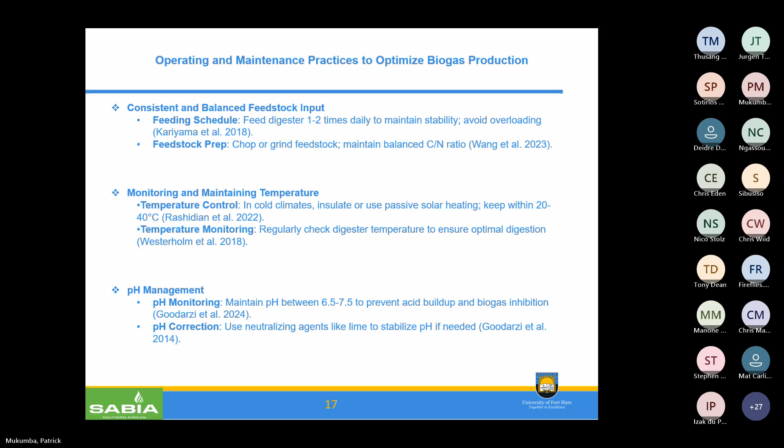Also, on maintenance, ensure that your digester is always steady, and that the biogas produced is collected, because you cannot just produce biogas and not utilize it. And also there should be slurry removal, because as biogas production takes place, you get new slurry, or a new digestate, or a new effluent.

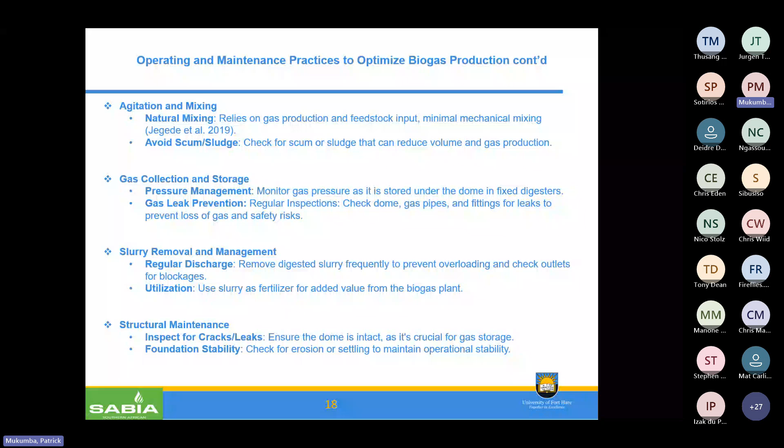So you are supposed to collect the effluent, and you can use this effluent as a fertilizer, or you can sell the effluent. And also structural maintenance, all those factors are considered.

And also, on the maintenance and operation of these digesters, you should consider avoiding the use of inhibitors. You can find that sometimes chemicals are used, like let's say a Blair toilet, and you want to produce biogas from those waste in a Blair toilet.

So you can find that if you just take water with soap and pour it in that digester, or pour it in that Blair toilet, you'll find there's no biogas production. So we have to consider all these factors that affect our biogas production.

And also routine maintenance - you have to all the time check, okay, what is the pH, what is the temperature, biogas production, the methane content. You have to check the methane content because biogas is mainly carbon dioxide and methane. This is why you need biogas analyzers, which can tell you the amount of methane.

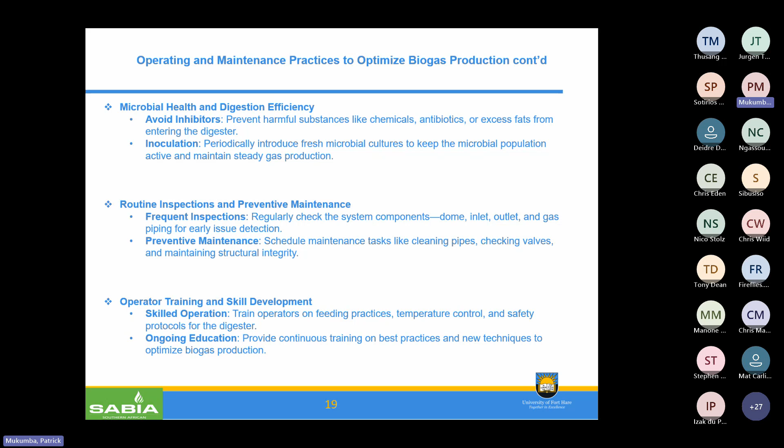And also operator training. These operators need training, because if they're not trained, it means digesters can fail.

And also troubleshooting common issues in biogas production. There are a lot of digesters that have been designed and constructed in rural communities, and most of these digesters have failed because of a number of reasons. For example, we can have gas leakages caused by cracks, leaks in gas pipes, and improper sealing of joints.

How are you going to solve that problem? You should check it regularly, check all gas pipes, and ensure all joints and connections are properly sealed. And also excessive scum formation.

You can find that sometimes there's a scum problem and you don't see any biogas production. This means you should check what the problem is - it means you need to stir your digester. This is caused by high levels of fibrous and undigested material in the feedstock, and inadequate mixing or agitation within the digester. The solution is pre-treatment.

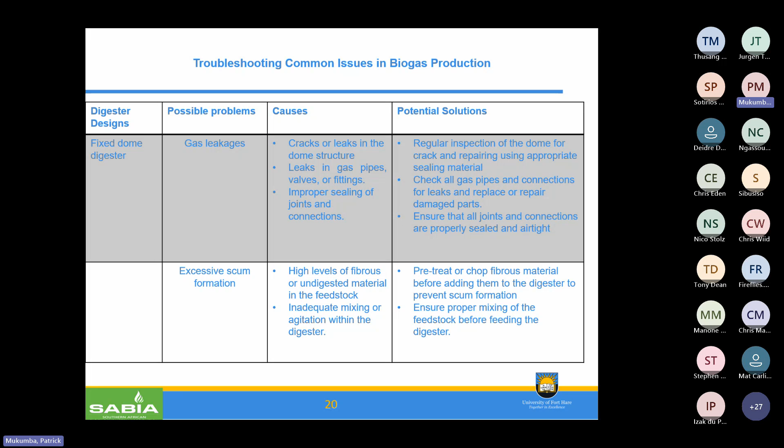Also ensure that you use agitators or stirrers.

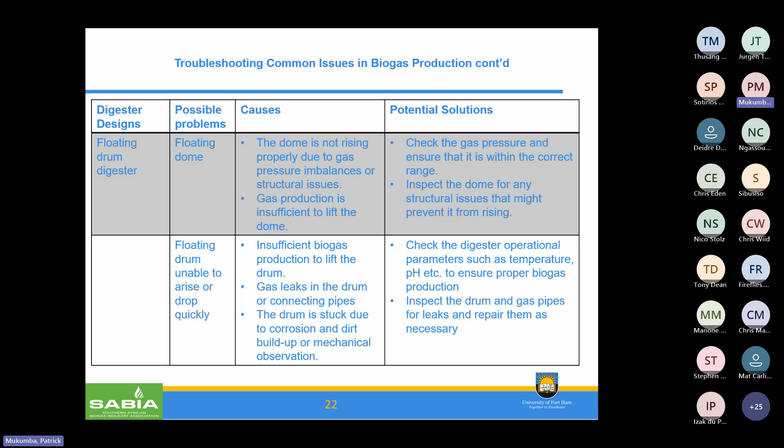Also, the drum can corrode sometimes. What causes the drum to corrode - these are the reasons. And possible solutions: we need to paint the drum regularly and apply anti-corrosive paint.

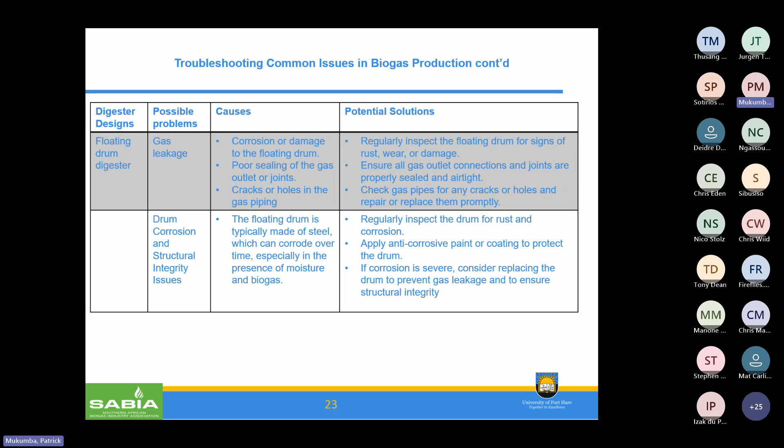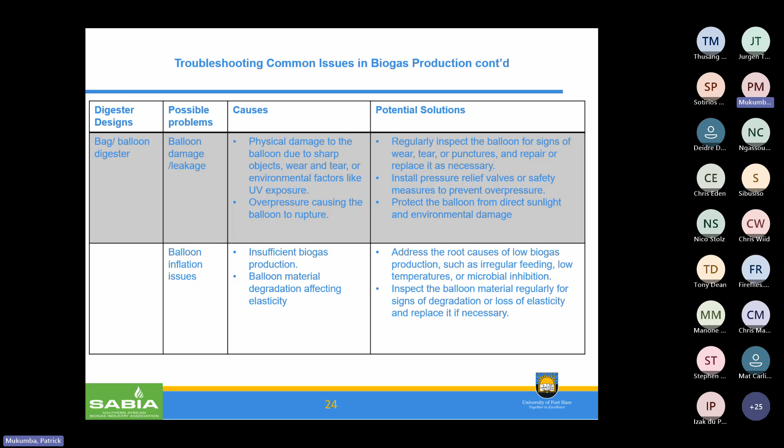Also, for balloon digesters, you find there are a number of issues: balloon inflation problems, insufficient biogas production, and balloon material degradation affecting elasticity. So you have to address the root causes and inspect the balloon material, because you find the material fades over time.

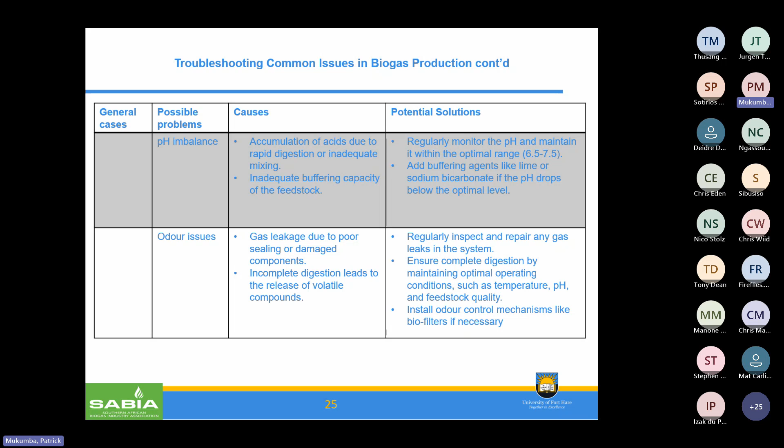Odor issues - sometimes you go to a digester and around it the place is smelling. Then you start to wonder what is causing this - gas leakages or incomplete digestion. The remedy: check regularly and repair gas leaks, ensure there's complete digestion, and install odor control sensors. This can tell you there's so much odor coming from the system.

Also, slow digestion and sludge accumulation - these are caused by low temperature, high levels of inert materials in the feedstock, and insufficient microbial activity. The solution is to insulate the digester to maintain a stable warm temperature.